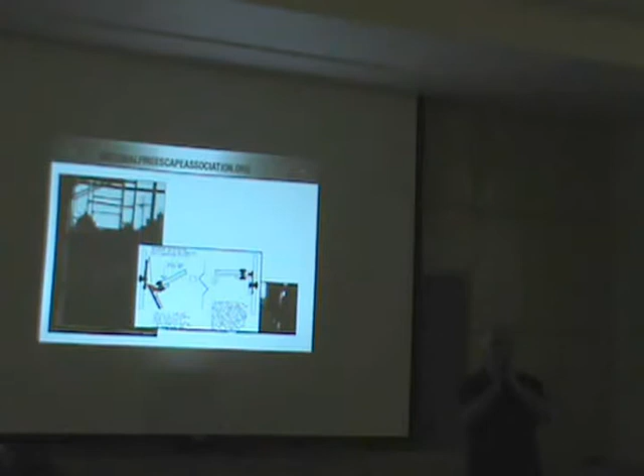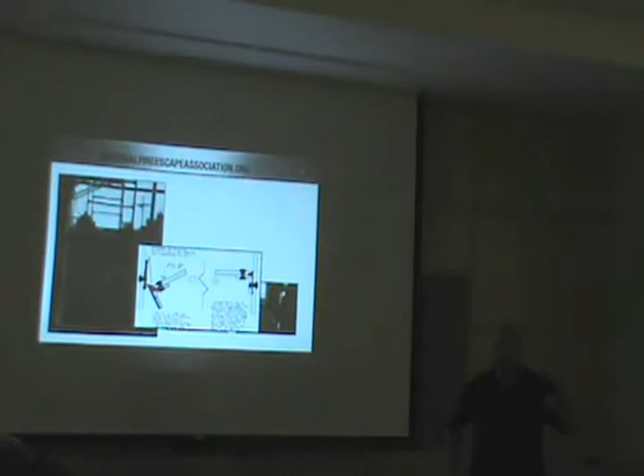It's because either rust jacking has forced the tread away from the rivet shaft, or, as with some of these bolts that you have floating around, the whole interior is eaten, and what do you get when you put enough pressure on it with a foot? And that fireman fell through 3 of them. And basically he couldn't work the rest of his life. He was out for the rest of his life.

So this is all actual evidence that we used in the case to basically say the owner saw it coming, okay? So cantilevers, now we were just on cantilevers, right? So here's how the rest of the cantilevers in the United States are built. Basically, I'm going to give you an example of what happens in the history of a cantilever. See that weight box there?

A lot of the weight boxes are either huge cast iron pieces, or they take a box and they clean out their shop. And they get every punch, every leftover cutting, and they fill in this box. And sometimes these boxes are properly covered, and sometimes they're not. So what happens to rust? If somebody still has that rusty piece, a 1/4 inch grows to 1 inch, can somebody just lift it? So that's what a 1/4 inch of rust looks like. A 1/4 inch of steel grows to 1 inch, and it gets heavier.

So as soon as a fire escape box, cantilever box gets heavier, what happens to it? It overlifts. Right? It's a seesaw. 1/3 is for the weight, 2/3 is for the stairs, pivot in the middle, you add weight to the box, what happens to it? You're an inspector walking by and you see this thing pointing to the sky, what do you write? It doesn't look natural. So what do you write?

You write a violation. So I'm the owner of that building and I don't want you to write me a violation, so how do I fix this? Because I've had somebody come look at it and say, we can rebalance this for about $4,000 or $5,000. So you go to Home Depot and you get $10 worth of chain. You chain it here, you lift it there, and you tie it to some structural member, or to a piece of grating or to anything. And now she's horizontal. Any violations coming? So if you see a chain on a fire escape cantilever, balanced or unbalanced? Maybe. So with that, you start getting these things out of bounds.

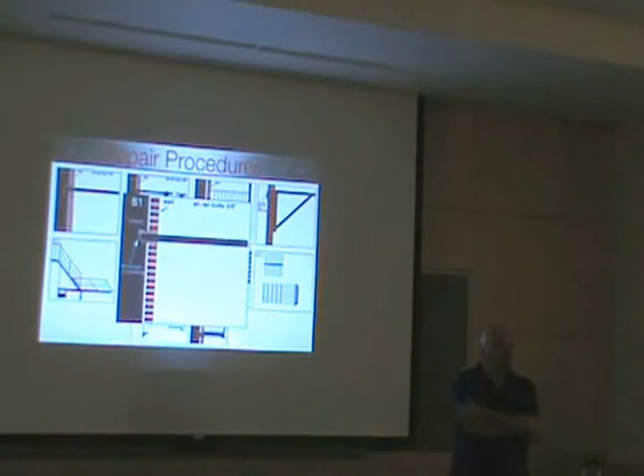But let me finish the lawsuit that took 7 years. The guy wanted $22 million. There were 7 lawyers in there. Everybody, including the city of Chicago, was involved in the court case. Because guess what the city accepts as an affidavit? A simple form that says it's an opinion. I've looked at it, it looks structurally sound to me, and it looks painted to me.

To the best of my information, knowledge, and belief, the fire escape is in conformity with the Chicago building code, right? So everybody got dragged, took 7 years, the guy wanted $22 million, he did get conked in the head. But what broke? The fire escape was fully refurbished and load tested. But what about the weld? It looked spectacular, there was no rust. There was no rust anywhere in that connection.

Nice and tight. What broke it? Well, after the piece finally conked him on the head, when you hit the ground and it torques like that, what happens to the weld? The rust inside that there was, because when you take an old rusty fire escape and you put a new piece of metal up against it, and then you paint it, do you ever paint inside?

So the 8 to 12 welds all around the whole piece, where did the weld start rotting? From the outside in, that had paint on it, or from the inside out through just natural moisture and condensation? So you have a weld rusting from the inside out, which can't be visibly seen by anybody here. There's no Superman here. And all of a sudden, you add the misuse.

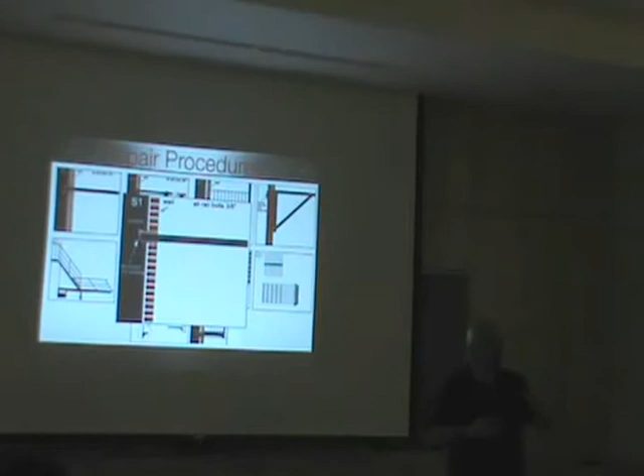8 to 12 inches deep. So once it gets beyond the veneer, it's only 8 to 12 inches deep in a pocket. Is there any brackets or any cross things welded back there so it doesn't pull out? Nothing. It's just a T-bar or an angle in there, pocketed, cemented, done. Got it? Every fire escape was built this way.

So what happens is water, spalling, and a lot of times, a lot of work is done towards the surface and not into where it's structurally tied in. So what happens when you have two full sets of stairs on a bracket that is all by itself, because somebody took it out of here when they fixed this window, then they put that bracket back over here. Can a 4 or 5 foot C-channel carry 2 staircases on it when only 8 to 12 inches are buried into the wall? So this happens all the time.

When you put the bracket, again, 8 to 12 inches deep, a lot of times it's buried back into the wall here, and you know what happens? That drives water back into your building. Okay? And then it either has a single bolt or a bracket at the top. But that's what it looks like. That's how all fire escapes are going into masonry buildings. And you get this kind of spalling when the water's driven into it.

Through bolts. Some of them are big plates, some of them are these little cast iron buttons. And what do they do with that much force on a single brick? What do they do? Right? Every now and then you got so much water hitting that fire escape that you get this. In order to get that much green on a wall, what do you have to have? A lot of water.

So rust jacking. To grow 1 inch, this is a library in Boston. A public library. 1 inch on that gusset. What's holding up that platform and that staircase? The rust. Now, if you want to grow exotic ferns, fire escapes now are a great place because nobody goes on them anyway. Firemen are not on them. Building inspectors are not on them. So if you've got some exotic ferns you want to grow, it takes a lot of water.

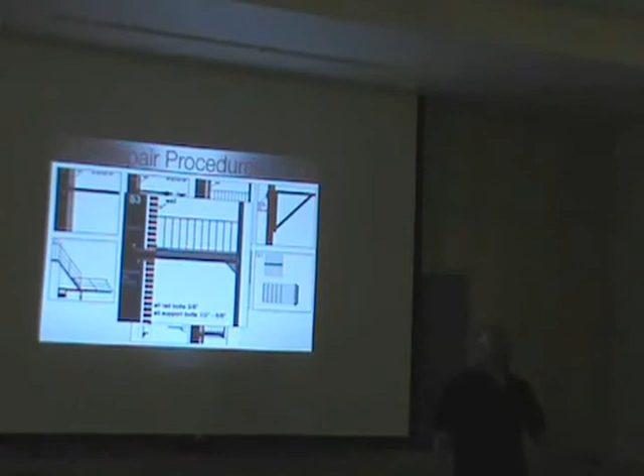One of the ways to basically get a fire escape, if you have a problem in the wall, is legging it to the ground, sitting on a sonotube. This is how all fire escapes are built. And a lot of times they're not even pocketed into the building. They're just attached with an angle or with expansion bolts. And sometimes this is the answer when you have a wall situation. How are you going to cure it? You're going to put a leg to the ground. If the wall is in question, you put another leg along the building to the ground, what do you have? A freestanding structure.

Can't put razor wire on these fire escapes. People do. A lot of times you have trucks that hit something, and what do they blow out? The interior masonry or the exterior veneer? A lot of times it's just the exterior veneer that gets blown out, but sometimes people have to open it up even more to see what happened inside the wall there.

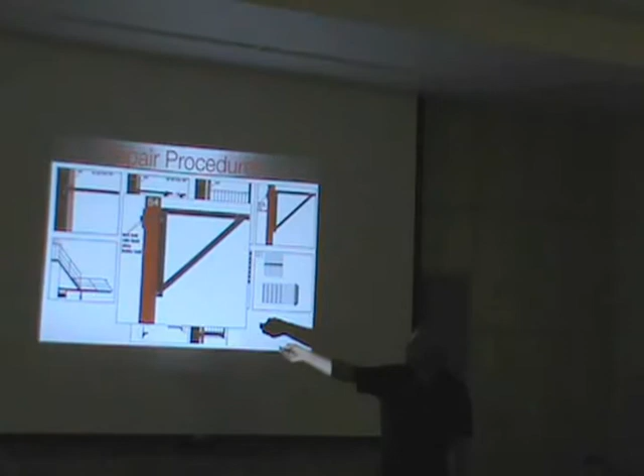And the last is wood structures. All wood structures must have a through bolt. When you get to a fire escape and you see 4, 6 lag screws, that indicates that somebody has not properly attached it with a through bolt and a plate. And that's usually a 5/8 or 3/4 through bolt with a plate, picking up some studs. You see a lot of lag screws, that means somebody didn't know what they were doing, and the answer is you just have to put in a through bolt.

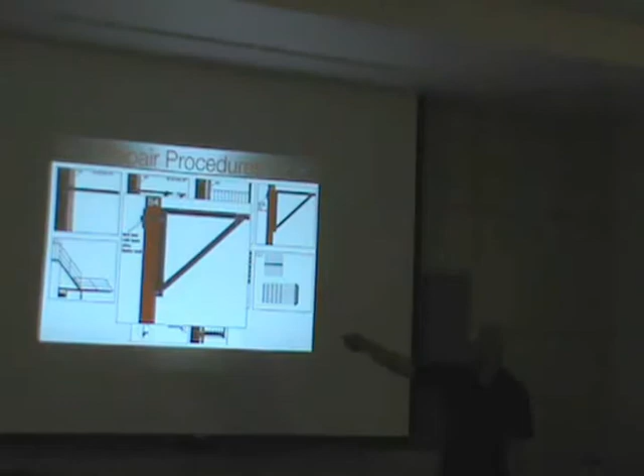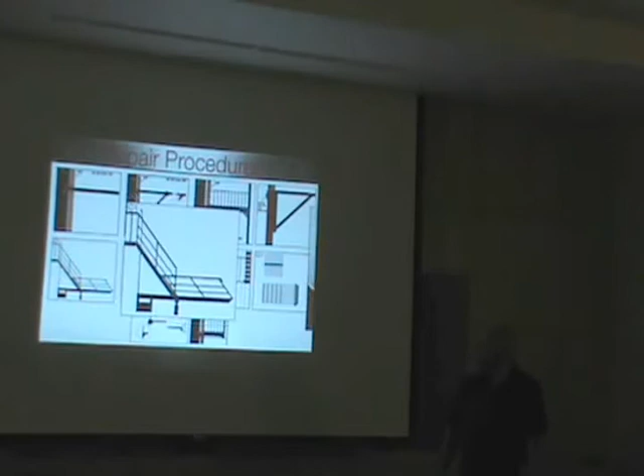Cantilevers, see the release arm? There's 2 types of release arms. One that's here, and sometimes you have one that has a weight on the nose. Very difficult to balance, the ones with the weight on the nose. But the release arm basically is 1/3 to the back, 2/3 to the front, and when you release it, which is a simple bar that comes down, it lets the cantilever drop 2 to 3 feet per second. Otherwise, if they're hanging down and you got a cement truck backing in, can you see that thing up above?

By the way, what happens when a trash truck, a cement truck, hits your fire escape? What do you call that? Oops. No, it's called a fire escape lottery ticket. Because here's what has to happen on that fire escape. First of all, the engineering firm is gonna get paid by who? The owner or the insurance company? The entire fire escape, not just the damaged cantilever, needs to be repaired. Because in order to bring it back into service, what must pass the inspection?

The whole thing. So somebody gets there and they have $10,000 damage to the cantilever and not much else, but yet the rest of the fire escape has been ignored for 25 years. Guess what the insurance company has to pay? They pay for the cantilever and the refurbishment of the entire fire escape, and all fire escapes must be structurally sound, must be kept painted. So if the thing doesn't have any paint, what does the owner get? A paint job. So the next time a fire escape gets hit, a cantilever gets hit, guess what that means for the owner of the building? The entire system is out of service, and the entire system needs to be brought in.

Yes? A question for refurbishing guys, are you guys finding that homeowner insurance is paying for a lot of this work? I am. Red tag, are you? Yeah. So the insurance company covering the building's paying for it? Every time. At 100%. A lot of times vendors just don't know it, or engineers are not aware of that clause, and they just fix that small piece. And it's right in their code. Must be brought back into service, the entire system. So if the entire system has been ignored by the owner, the insurance company is still paying the bill. And that has happened nationwide. I've done it all over the country.

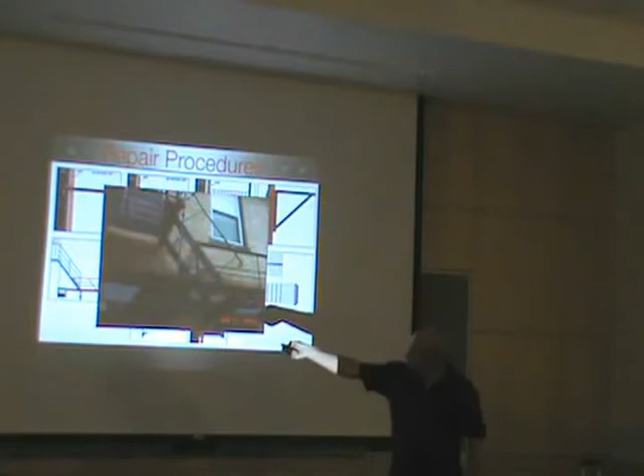So, right now, they're in the open position, they're parallel to the arm that they were blocking. And you see the chain? See the chain right there? So these are easy to make. Any guy can make a release arm. You know what I'm saying? To basically lock in a fire escape so nobody pulls it down anymore. But this must be balanced. So 1/3 is usually at the back, 2/3 to the front, and it's a seesaw pivot.

And the goofy piece of that for Portland, there's one that I know that has a release mechanism on it, and that particular device isn't functional at this point. While we don't see those, we do see check chains. And those chains actually have a spring mechanism up at the top where it attaches to the balcony above the counterbalance stairs. Those are legitimate. It's the straight chain with absolutely no relationship whatsoever to the old-style spring-loaded mechanism. All it's supposed to do is keep the stairs from overswinging coming up.

Right. Just keeping it from going up. Basically, what the lower arm on this release device does is just keep it from overextending and going up. So that's Portland's weird twist. Well, it's a pre-existing structure, so it was built, so you have to step on it out 2 or 3 treads.

You have to activate it. So in the past, you activated it and it started dropping by itself. Nobody can get it that balanced. It's very difficult. So that check chain is exactly when you get off, she goes up by herself. And so that, at the end, that spring basically lets it push, not snap the chain, it lets it spring the chain, and then basically she'll just do this until the thing goes horizontal. But she's still balanced backwards, which is a standard here in Portland. So don't think you have to fix that.

If you want to fix it for your client, you basically want to take some weight out of the box so that she wants to drop. She still has the check chain on it. You build a release arm for it so that now nobody can pull it down even with a pipe pole. Because they're going to have to use their ladder to get on it, get up there, and then open it up and release it to come down. It's made only for the tenants. It's not made for these guys. Got it? And it's actually a security answer.

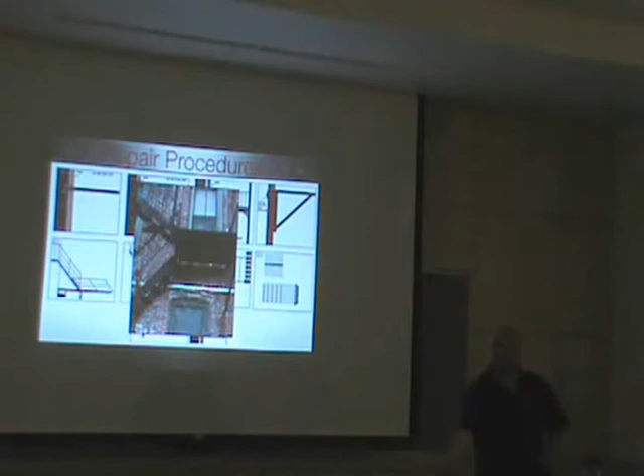And she's not heavy. So what kind of maintenance does that require to keep it operational after 25 or 50? Oh, the way they build them is so simple. I did it incorrectly, can't go back like that. But there's no bearings, it's not really tight, it's very sloppy and loose. It's a bar that's 2 feet coming down for 6, 8 feet, and then there's only a 6-inch little bar down here that hangs over the C-channel. And she's going through a washer, or a pipe or something, and no grease ever needed in its entire life, so it's not rock solid tight. She is sloppy. So it's just an oversized sleeve with a pipe?

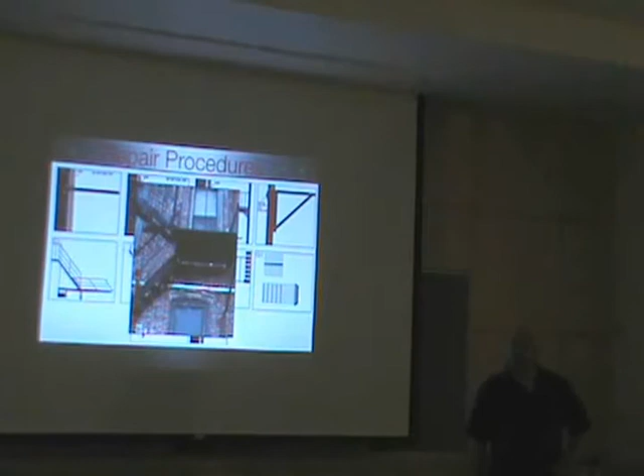Right. So basically, if it ever starts rusting, you have to clean the rust out. You have to treat that. I've never seen one of those rust out. They're so sloppy and single action that you can make them on site whenever you get there, as long as you have 3/4 or 7/8 round rod. And a lot of times try not to weld those. Try to basically heat the bends so that it's all one single piece.

So you heat the 2-foot extension that blocks your way, comes down from 6 to 8 feet down towards the thing, already has the pipe or an angle with the sleeves, and then at the bottom you heat it for the 6, and then you have to back up that 6 with a 45 bar just to give it some reinforcement so that when it hits, she doesn't bend anymore. But I was just gonna go back to show you, it's a sloppy release arm. It's really built on site.

Stu, have you seen many of those in Portland? No, and that's what I was saying, there's only one that I'm aware of that has a first balcony level release mechanism, and that particular one is actually a fancy rollout stair. It drops like the New York ladders, but then it rolls out and becomes steps. And I'd love to see that one refurbished and put back in operation. It's very neat. We've made 2 stabs at it across my career. We put the releases in on the building over in New... See this right here? So we got a couple up on MLK.

So see the space here, the tube right there, and there's another tube probably at the top of the rail. It's 6 to 8 foot long. Again, they welded this here, and this is probably a heat bend right there, basically to grab the top and the bottom, that locks it in. At the very top, a lot of times it goes over a bump so that it stays there, or you actually have a chain on it, so that the chain comes from the side and loops into it, so even if somebody from below could try to, the chain prevents somebody from pushing it that way, but when you get to it, as soon as you stop pushing it, there's nothing holding it in position.

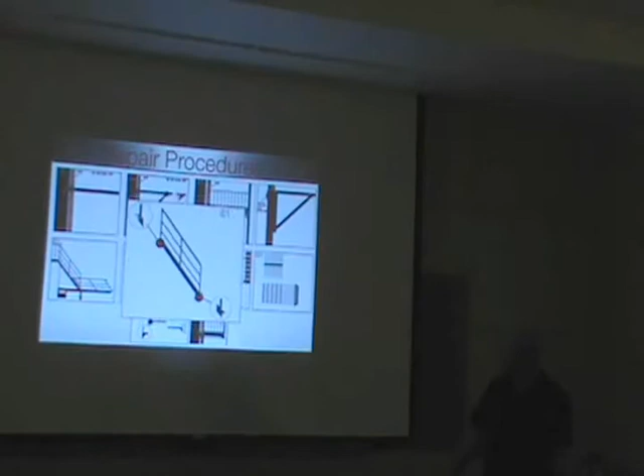Actually, we've had a couple of firemen's ladders, which is that goofy thing that Cisco's talking about here. For the city of Portland, we have firemen's ladders on these things. And we had more than a couple of them across the years as they're coming down below the lower balcony, if you have pictures on there, that have been hit by trucks, trains, whatever. If this thing has got an S-curve to it in any way, shape, or form, that ain't right. And it's been hammered. And that makes this balcony system suspect. So when you guys are looking at that and dealing with that.

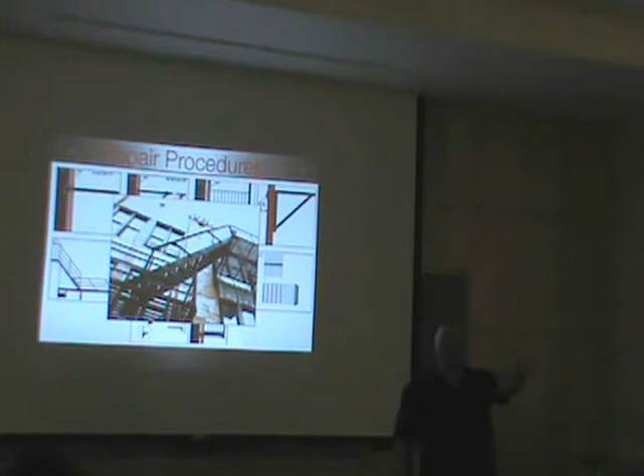But that's a lottery ticket also, it's called a lottery ticket. Yep. Because now that you smashed the lower ladder and everything else still looks good, the whole system is now out of service, and the whole system now must be refurbished and or load tested, not just fix that piece, because you've basically taken it out of service. Even if it was load tested just a year ago, it has to be reload tested that year, and the whole fire escape needs to be refurbished.

Now, if it's never been refurbished, that client gets a free pass, but he's getting the whole thing repaired and painted. If it was just load tested, or refurbished a year ago, and that's the only thing damaged, then you're only gonna fix that piece and then issue evidence of strength again because the rest of it was fine. But a lot of times these lottery tickets are on old rusted fire escapes, and the client is like, oh my God, until they find out that the insurance is gonna pay for it 100%, and it's the truck insurance, not the homeowner's insurance.

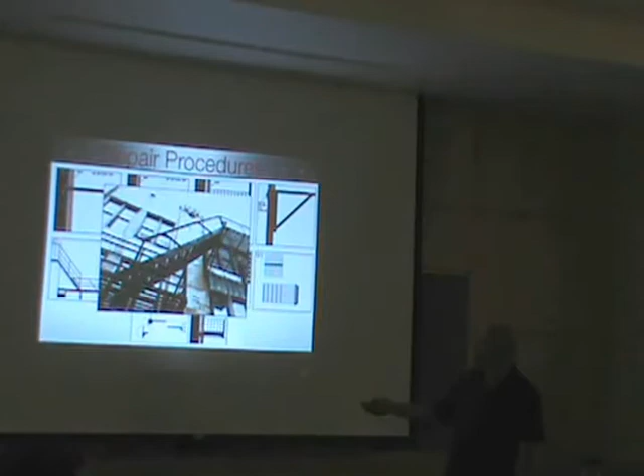And we've had one recently, I believe the property owners tried to do the repair themselves. So if you see the one with the aluminum ladder piece on it, that's not right either. So, guys, here's a 24-story hotel in Chicago where you've got stringer issues and connections, but the stringers are also no longer connected to the building. Now, the only thing holding this stringer up is the railing system, all one piece connected, passing through. So you got some crazy stuff as you walk up as an engineer, that sometimes you're basically load testing it with your body.

Rust in the stringers is one of the biggest problems that you have, because here you are trying to fix the fire escape. So as an engineer, when you do a plan with anybody fixing a fire escape, one of the first things you gotta work on with your vendor is an emergency plan to make it functional until such time that permanent repairs take effect. And what's that mean on this connection here? In order to let the vendors get on it and fix it, they gotta take that bolt out during an emergency plan and put a new bolt in it and leave the rust there.

They gotta take all the treads that have ½ inch of rust and do what? Take the bolt out of the front and put a bolt in it for what? To make it functional for who? For the vendors. Then they can start repairing it once you secure the fire escape. Because every now and then vendors get on these things, climb all over it, and what happens to these vendors? Like my guy's father from Chicago. Fell 7 stories to his death. Why? Because of one of these bolts, one of these connections. How long is it gonna hold? We don't know.

Treads, when they start falling by themselves, that's an indication that nobody did that. That's happening naturally because of all the rust that you see in front of you. Trucks back into fire escapes all the time.

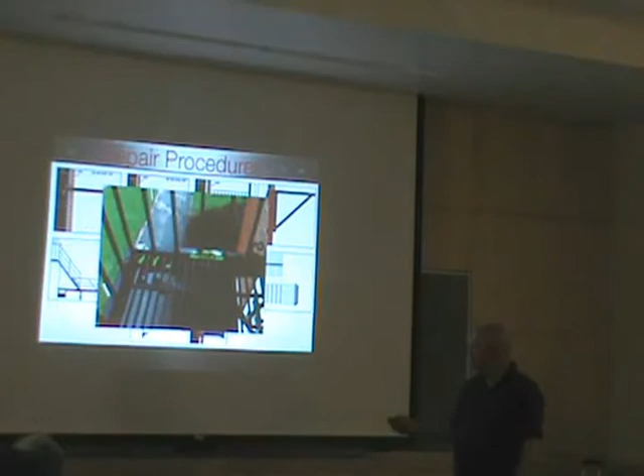Railings. You guys are gonna love this one. Sometimes when railings are squished between the C channel, what's happening in between those two things? Rust jacking. It's eating the rail bottom and it's eating the channel top. Just poor design. A lot of times it's just poor design.

Spacers. Sometimes you have spacers in certain grating ones. A lot of the West Coast is made with flats, not with grating standing up. It's flats, 2-inch flats laying on end. So everything accumulates rust in a connection. These spacers hold it for 1-inch spacing. So a lot of times when these rot out on the inside, you can't fix them. There's no way to fix them.

What role does the U-bolt just between two slats in my deck play? And I heard that you have to have 2 U-bolts per runner. You're talking about on the deck platform? Each fire escape has U-bolts, but they're not tied into a structural component. They appear to be just on the slats. I went under and looked, it's not on a structural portion, and someone told me that those have to have 2 per length of slats.

Usually, if you have a piece of flat, 2-inch flat by quarter, running 10 feet wide, those slats that run this way are not structural. Usually it's the slats that run this way, every 3 feet, let's say, and they run from the front angle frame to the back angle frame. And these flats are held down by rivets. A lot of times you'll have a U, it's actually a square U, not a round U. If you were to remove these that go from the nose to the back, and you cut off those bolts, you can actually grab that whole 10-foot by 3-foot wide platform and take it away.

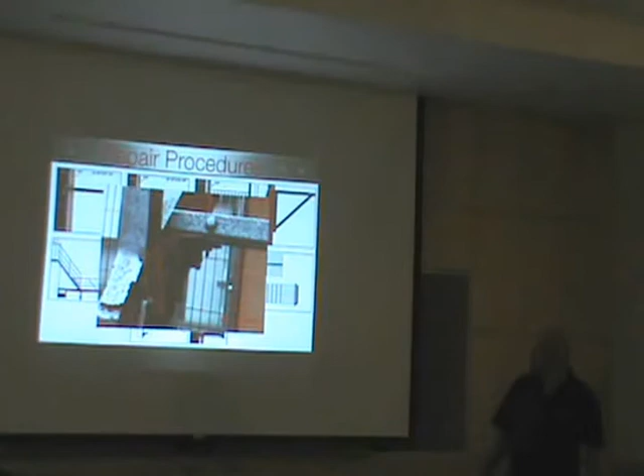1 inch of rust. And that's actually one of the reasons why we have our visual check sheet for the inspector. You guys, we don't want you stepping out there and getting hurt. If it looks bad, it's bad. You don't have to go any further. And the same for your guys. I mean, if it looks bad, you probably ought to figure out some other way to get out there. Jetpack, lift, I don't know, but something.

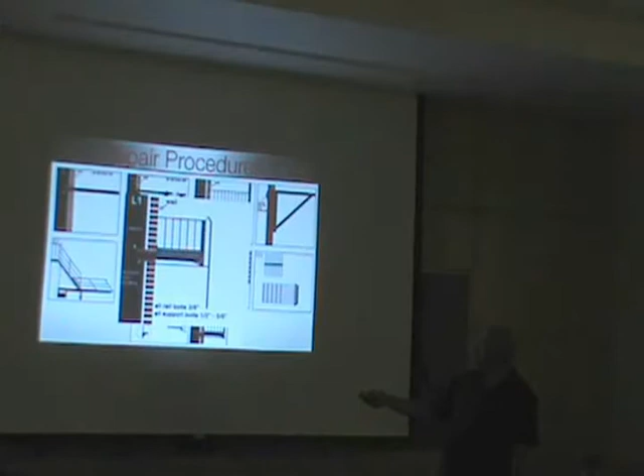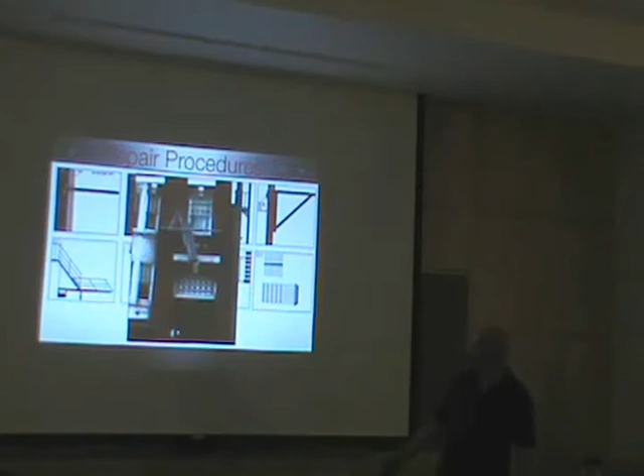So let's, ladders. Ladders are the biggest issue everywhere in the United States. In California, they have the 3-fold ladders, basically almost like going into an attic, and you release it, the 3 come out. So that's very common in California. There's something you don't see up here very often. How about an accordion ladder? And basically when you release these, and these go up to 25 feet, you release it and she's like an accordion, she just opens up. And then she becomes a stiff ladder that you basically climb down. So this is how you get off of building rooftops in California, down in LA.

How does that recollapse and put it back? There's a crank, see the crank right at the top? Good. And you bring it all galvanized. Standard ladders, you know, that basically mount onto the wall. Ladders with weight systems, and they create all kinds of weight systems, but you're supposed to control these weight systems so they're not just dangling there, because in case the cable breaks, what do you get? Impact. Impact, chunk of steel.

And then you have these goosenecks. Goosenecks are a big problem for a lot of firefighters. How are they in the roof? Nobody knows. You can't touch the roof. It's a whole other game. How they go up and over, and a lot of times it's all original hardware tying it back into the building. So these must be addressed during all inspections.

And then you have these ladders. Some people have taken what used to be a permanent ladder to the ground, cut it, and created a flop out. Now, a flop out ladder is not legal. And a lot of times they put a chain up at the top so that you can gingerly let out. And as soon as you let out enough of that and it goes beyond a certain point, what's it doing? Absolutely nothing. And if there's a dog, a child, or a fireman down below, when that ladder gets pushed by a person, what happens to them? Even if they're wearing a helmet. They're gonna get driven by the arc. Boom, right in the head. So these are not legal.

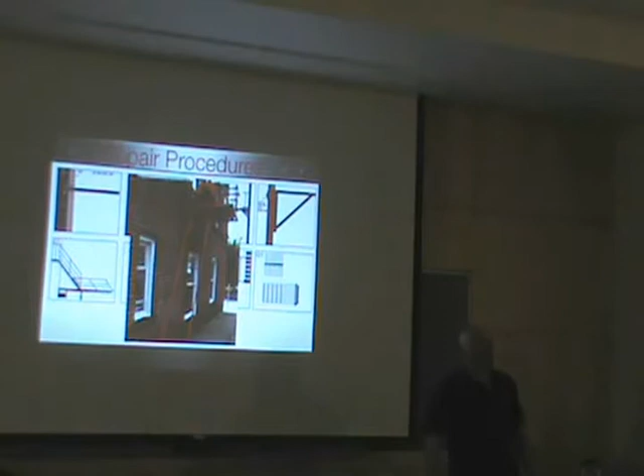So, we highly recommend you always paint your fire escapes on the way up. Make sure you're safe going in. This fire escape was a total disaster. It was condemned. Here's the last thing that you guys will love. This is in Elizabeth, New Jersey. This is a slidescape. It's a one-way slidescape. This is the Elizabeth Fire Department, and this is on the rooftop up there.

And every floor down below has the same two little orange doors that you basically open in like this, and when you open them, you're looking down this corkscrew made of galvanized metal and tin. And there's no lights, you don't get handed a flashlight, and there's no potato sack that you get with it. And right down here, guys, see that little piece right there? That's the corkscrew for 12 stories. You corkscrew all the way down until you hit this building. Designed for use in wool and cotton clothing. I hate to think what polyester would do on that.

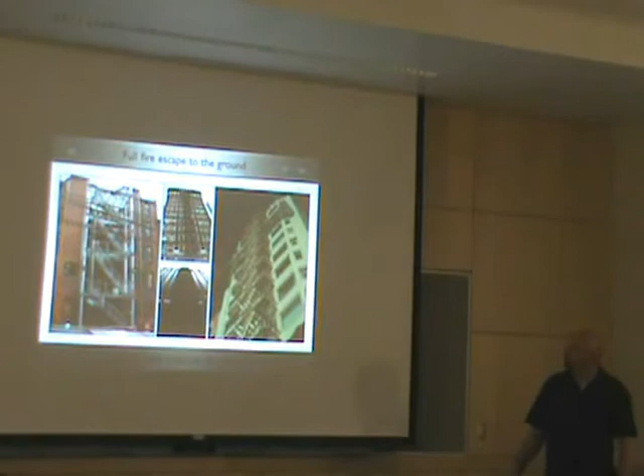So what happens to aluminum if that window below has a fire on an aluminum fire escape, which is legal because it's non-combustible? What happens to the aluminum? Only parts of it change shape. Yeah, shape shifting. So, plenty of fire escapes out there, guys. There's all kinds of stuff out there that you're gonna see.

Silos have fire escapes, bridges have fire escapes. Fire escapes are also used on billboards to get up there and get down. Hotels, now in New England and down in Jersey, Ramada Inns, Motel 6s, those guys that have the two-story fire escape systems. They always have a metal step, always outside somewhere, exposed to the weather.

And how do you get in your room? An enclosed or an exposed to the weather platform? So that's an exterior fire escape, going to an exterior set of stairs. How many motels have you guys been asking for a certification? Right now, the Ramadas in New England, we're doing the Ramadas over there because the city of Jersey City is already asking for all the hotels to have their fire escapes certified, because they have thousands and thousands of people using that egress every day as their main egress.

How about the wood structures you guys have in all these buildings? Is this a fire escape or a rear porch? If it has a second set of stairs that makes your second means of egress, what is it? It's a fire escape. Wood or steel. If you read the International Building Code, all exterior steel or wooden stairs, bridges, balconies, and fire escapes must be examined. So this is just the tip of the iceberg. These fire escapes, it's just the tip of the iceberg.

How do you get your exterior steel or wood stair not to be examined? You enclose it. As soon as you enclose it, nobody can touch it. That's another city official. But you leave it outside to the weather, and it's wood or steel, it needs to be examined. And these things last 25 years if they're pressure treated and properly maintained. And non-pressure treated, how long do they have? 10 to 15? And some of these are hitting 40, 50 years old. Some are older than that.

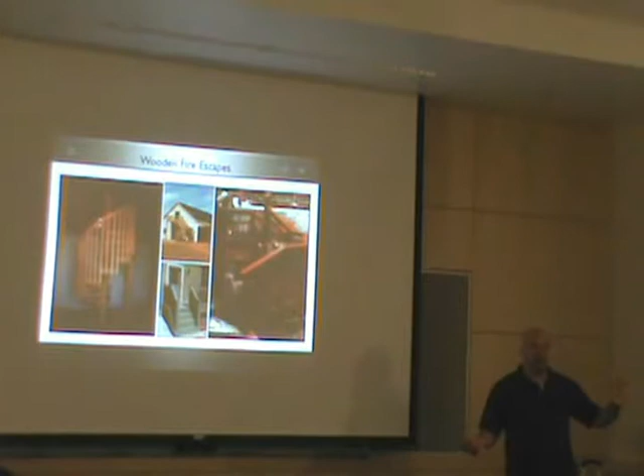So you got a lot of things out there, guys, that are gonna start coming up in the near future, because once Portland is done with fire escapes, guess what they're gonna start touching? All exterior steel and wooden. How many people died in Chicago on that deck collapse, five plus years ago? 13? I think that's right. 13 people died on a deck collapse. That was a relatively new installation too. On and on. How about catwalks? How about handicap ramps? These are all egresses.

Installations, you guys got a lot of silos, and you got a lot of boatyards, you guys got tons of things out there that are by the river. And if they have to fight a fire anywhere near these things... how about this?

Whenever you see somebody putting a Home Depot ladder outside their window, what's that mean? What happened there? They got creative. That's a single-family home that got turned into a three-family, or a single-family home that got turned into a two-family where they converted the attic into what kind of space? Sleeping space, which changes the use of the building, which then requires a fire escape, right? Who normally catches this? Fire prevention or the insurance company? Insurance companies come in and say, you need something out of that window.